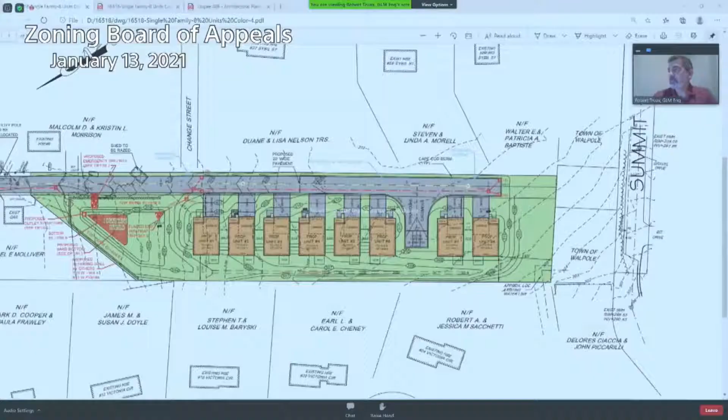Yeah, I do. Can I share my screen, Ashley? I believe so. Maybe is that feature? No, it's not letting me. You have to let me. Okay, here you go. Let me try it again. There we go. Which one do I want? Okay, let me zoom right in.

So the swale extends all the way up to Unit 8. This is where it starts, right here, right at the deck on Unit 8. So this water coming off this comes from here, and then Sean, this is a little bit of a berm right here. It goes up like right about here, it's about 2 feet high, and then it phases out. And then this is 307.5, 307, 306.5, and then 306. So this berm does extend all the way to Unit 8.

The water on the other side of Unit 8, like this grass area and this wooded area, this flows towards Summit Ave. But we're taking all this water from these units, this road, and we're bringing it towards High Plain Street to the drainage basin.

So Rob, then the reason for the confusion, I think at least in my part, was the landscape plan shows the swale only going up to the turnaround. So let's just check that and make that consistent.

Oh yeah, that's more just for planting. This one here, you mean? Yep, yeah, that's just, I took it off just so I could show the planting. I don't show any grading on that at all. Yeah, but I see what you're saying right there, the dash line kind of ends on this one. That was just put on a different layer, but no, the grading plan shows it going all the way up.

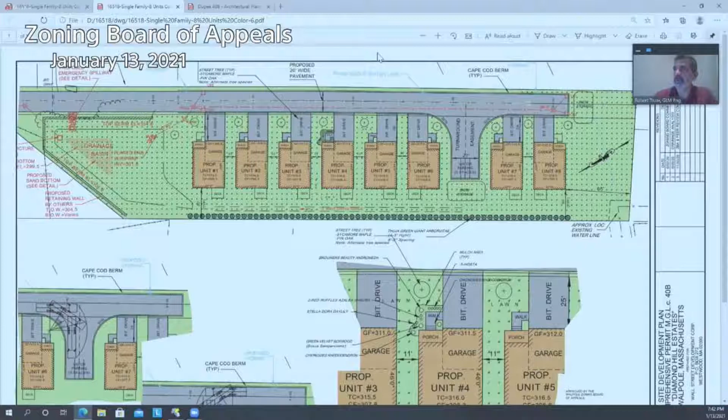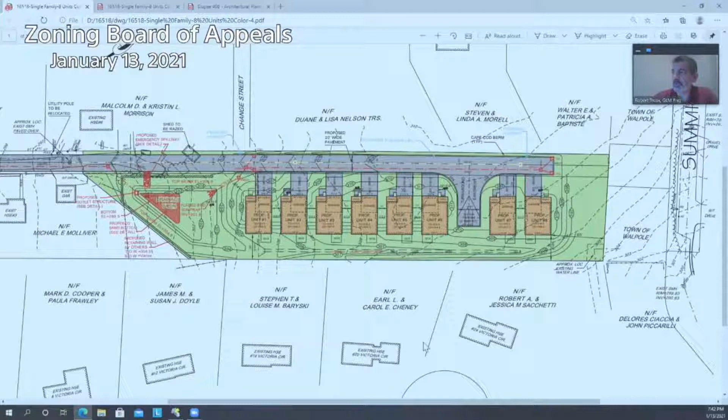All right. Yeah, the intent was from the last time when we spoke with you, was to get that swale up behind Unit 8, that you had asked us to do that. And then the plantings, obviously, and try to berm it up as much as we could with a little bit of area that we had between the swale and the property line. So that's what we were trying to do there.

So Julie, does that answer your question? Yeah, that's my question. And the good news for you is, there's not a lot of water. So you're at the top of the swale, so you're at the place where the least amount of water is. As you go down the hill, there's more and more water that gets in that swale, but you should be in pretty good shape.

So just as a side on the swale, Sean, when we met with Carl, he had asked that the swale be a stone bottom rather than just grass. So we could do that, and that would provide some more infiltration, as you were saying, get rid of some of the water on the site earlier in your comments. We didn't do that because if I model it as an infiltration swale, as you know, I have to be 2 feet above groundwater. So I'm just modeling it as a grass swale to carry it down the slope. But Carl had mentioned, why don't we just put stone in there, make it a stone bottom?

It's 3 or 4 feet wide. I think it's 3 feet wide. So we'd have a 3-foot stone swale all the way up, maybe with 12 inches of stone, and then it would provide some infiltration. Maybe it doesn't provide it in March and April when it's heavy rains, but it would definitely provide it on these small storms we get in the summertime. So that was a comment from Carl and I when we had a conversation.

Why don't you think about what makes sense in terms of the other comments too? I mean, the only concerns I have with that is it's already a really small backyard, and to put a 3-foot swale and stone channel back there, it's going to erode whatever they have.

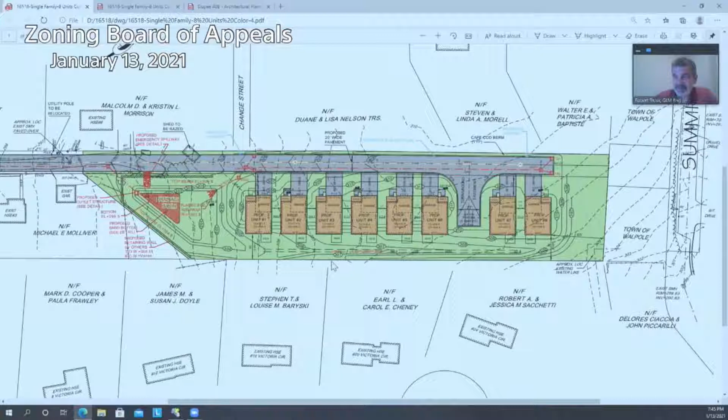Yeah, I'm afraid of check dams in the swale because it's only about a foot and a half deep. The berm - if I check dam it and it overflows, I definitely don't want to push it to Julie's house or the Doyle's house down further. All the people on Victoria, I really don't want that swale to overflow to them. That's the last thing I wanted to do. So I'd be a little leery of the check dams. I don't have a problem adding stone and things like that, but check dams I would be a little concerned to hold water back in that swale to build it up.

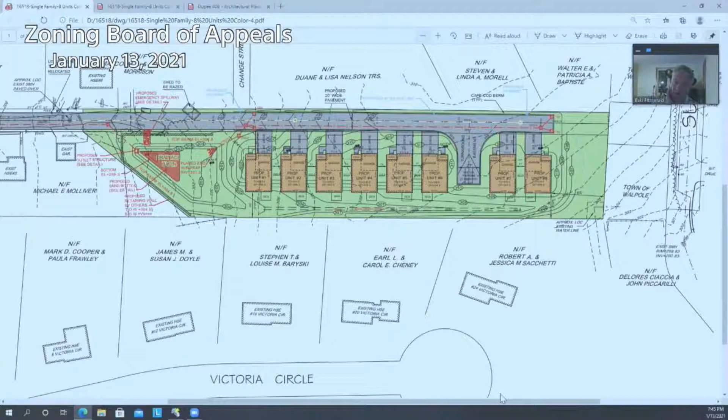Just my thoughts. Just ask a quick clarifying question. So some of the residents have indicated that they're using sump pumps and have issues in the basement under current conditions. So I'm assuming that means the groundwater is flowing from the site of the proposed development down towards Victoria Circle and intercepting their basements. Is that correct?

In some instances, I think it is, yeah. But not in all. The site's contours kind of push from the high point out towards High Plain directly in a perpendicular flow. So yeah, I don't think, if you were to follow the contours on the perpendicular flow to that - but overall, what's happening out there, Bob, is the whole area has poor soil.

So you have a perched water table. The water's not getting into the ground, so it's sitting on top of the poor soil. So 24 to 30 inches down, you have this water just sitting on top of the soil when we get into the heavy rains and the high water table season. Come summertime in August, that water disappears - you can dig a 15-foot hole out there and never hit water. So you go out there in April, that water's just sitting up there and it's not percolating into the ground. It's called a perched water table.

And these people, they can't get away from it. Their houses are all built deep in the ground. These houses that we're proposing, the cellar floors are at grade, so we're not injecting foundations into the ground - for the same reason they would have the same situation that those folks have, they'd all have sump pumps.

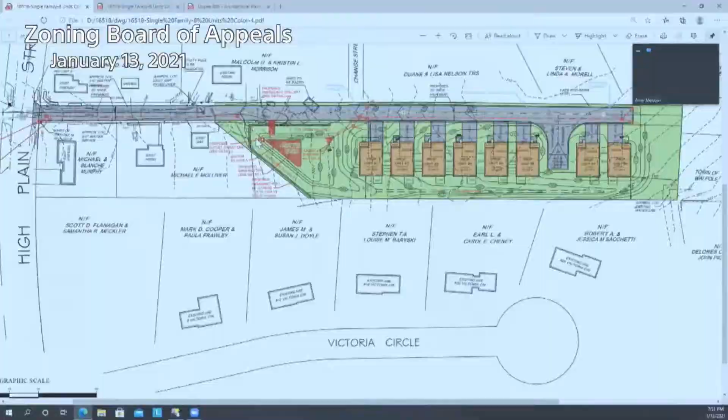But what we're missing is exactly what Kieran's asking about, which is the back view. What is the back view, and how many windows are on the back of the house? There's a proposed wood deck on the first floor. So what does that actually mean for the people behind, as far as their need for privacy?

But one of the things we have talked about is a vegetated buffer, meaning trees of a specific size and height that the zoning board would put in as a condition if this were to be approved.

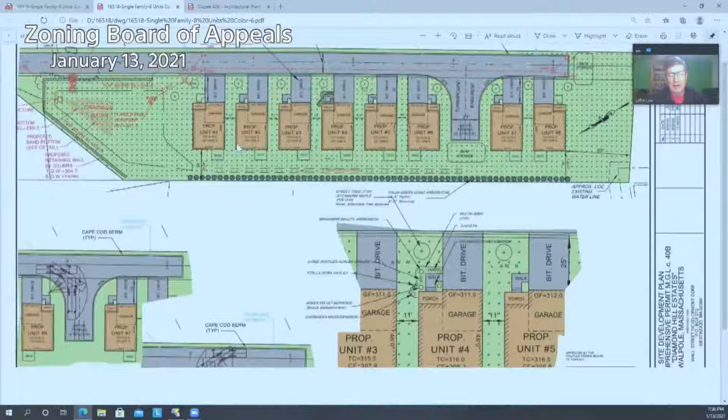So yeah, I think we show that on the plan. We put those on the landscaping plan here. Yep, I believe they were shown in that row. And I think the comment is that we're showing it 4 to 5 feet high, and the neighbor's comment is they should be higher. So maybe that's something we could look at, making them a little taller to start. I was actually pleased with the distances, but maybe not the size.

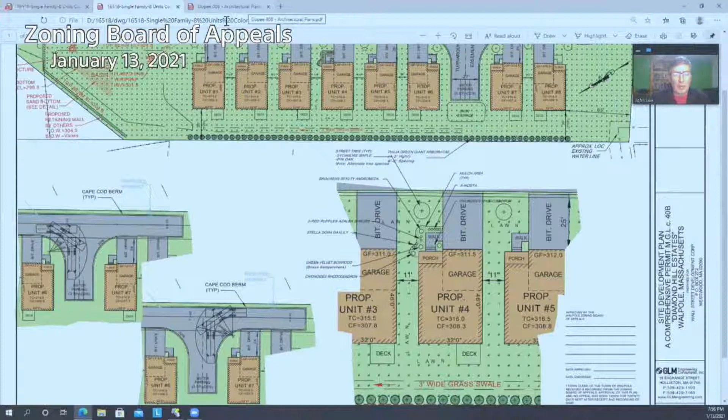But again, I think what we need to see is not just the front elevation of these units, but the rear elevation, which is going to affect the people living on Victoria Circle.

I think we could probably provide that. I have a picture of the rear, but no elevations are on it. Where'd you get that? Oh, that's the old ones, Susan. Oh, is it? Yeah, that was a duplex. That's all I got.

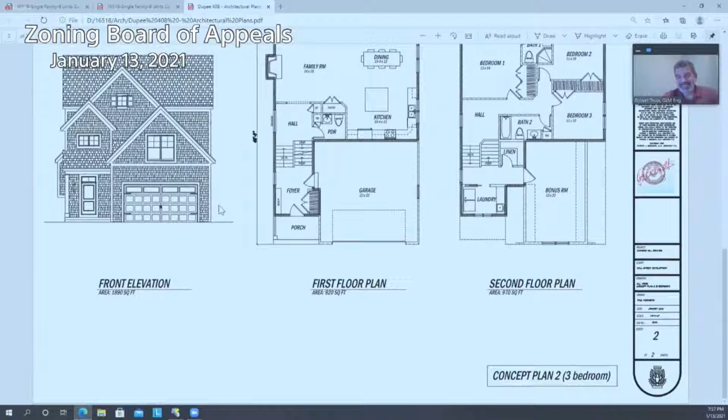Could you guys maybe generate a cross section through Dupee Street, through the proposed houses, showing Victoria Circle, just to show the change in grade between the two? I can try that, sure.

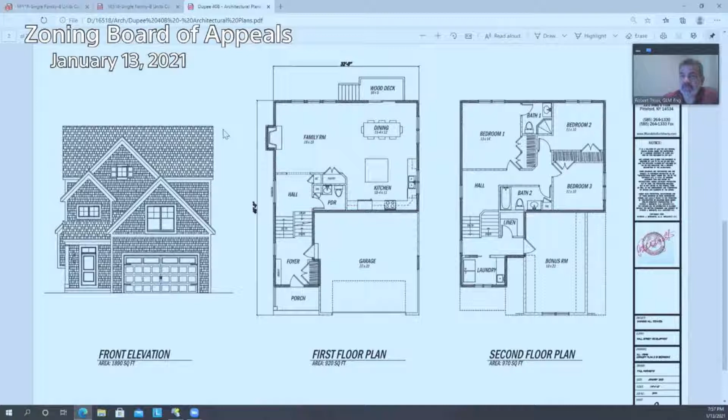But we can also get a rear elevation. I'm sure the architect could provide one quite easily. Yeah, the section would be a nice representation of where the landscape buffer is going to fall relative to the swale and things like that. It just makes it really easy to see that. We could try and provide that, sure. I don't think it has to be much, just a single line with a couple representative masses.

Okay, I thought we were going to make more progress on this tonight, but clearly we still need information from the fire department on the revised plans. We need some more of the comments addressing the peer review. Ashley, what else do you think we need to be looking at for this?

Yes, DPW. I think rear elevations are pretty standard to include with architectural drawings, so that would be great. I did see that they are stamped, so thank you for that. I will coordinate a meeting with the fire department so we can work through their access questions, and then we'll work on getting a letter from Cliff on the new plans. They'll definitely also want to see those architectural plans, and I think a section showing the grade would be helpful as well. So I think that's the homework we have on this.

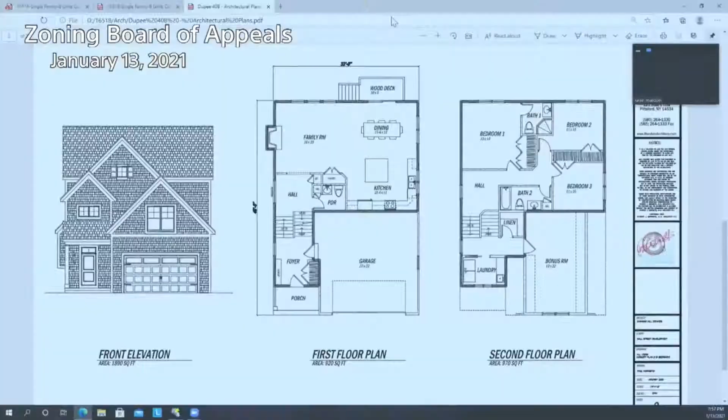And she's absolutely right. The water from Summit Ave comes down to that little walkway, which was really built to channel the water down to the other end of Summit Ave. There's a spot at the end where the road stops - no turnaround, just a narrow strip curbed on both sides with a 6-inch high curb, about 3 feet wide, that looks like a walking path. But it was put there to channel the water from up above since there's no drainage up there.

That washes out - a lot of water goes through there. That whole area up above Town Summit drains into that little pathway, goes down, and then gets into the drainage system further down, into the catch basins.

Very familiar with that. Can you fix it? Can't fix it - the town tried. They put in a little spillway to go through from one to the other. There was nothing there before, the road just ended. They used to have Jersey barriers in front of Betty's house - she's the last house on Summit before that little 3-foot pathway starts. Those Jersey barriers were destroyed by snowplows over the years, and it all crumbled and stayed there.

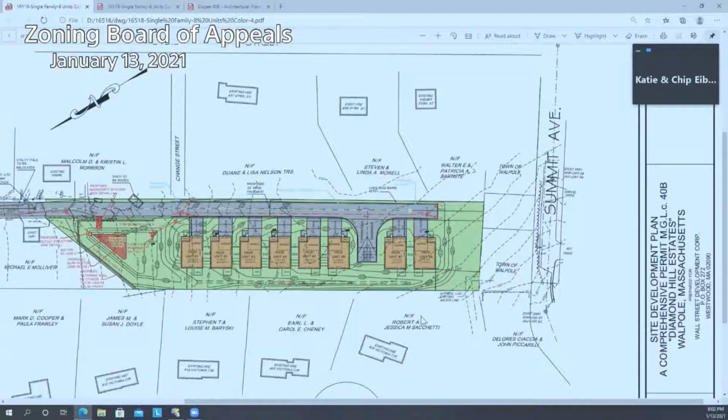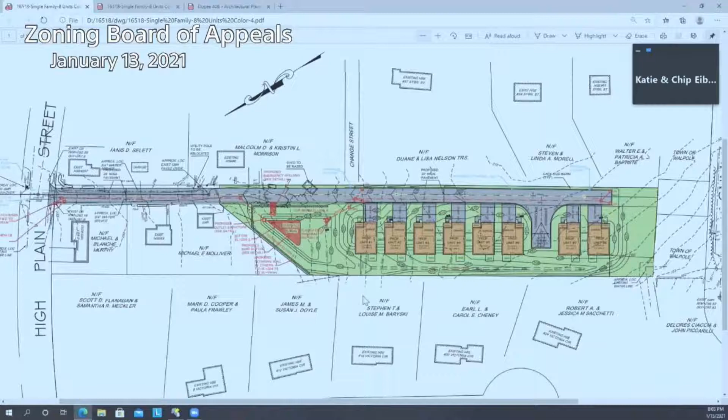All that crumbling cement and tar washes down every rainstorm. I literally have to call the DPW for a street cleaner because there's so much rock debris in front of our house, not to mention water - it's literally a river. I've had conversations with the town engineer about it. I have too. He's going to handle it. No, he's not - there's not much he can do without revamping the whole area and putting in a whole new drainage system. That's what he told me too. Yeah, and I don't think that's in the budget this year. I think you're right about that.

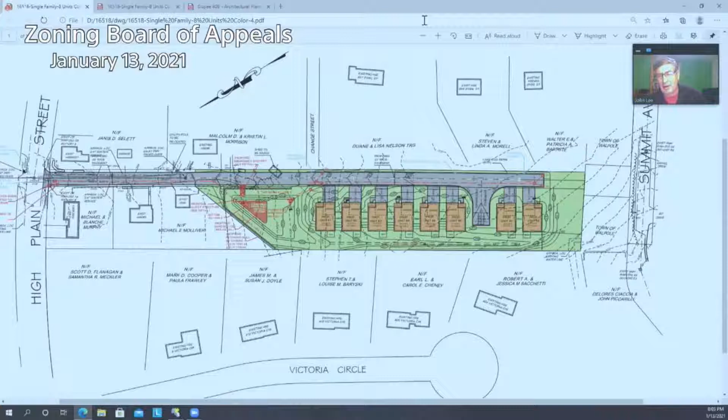We agree on something. If anything, some of the water that's up near Unit 8 now, which in the past would have gone towards Summit Ave and High Plain Street, will now be captured in the swale and brought to the retention basin. So it's not much of an improvement, but it's actually holding water from this site on site. It's not going to change the drainage for the rest of Summit Ave, though. Okay, thank you.